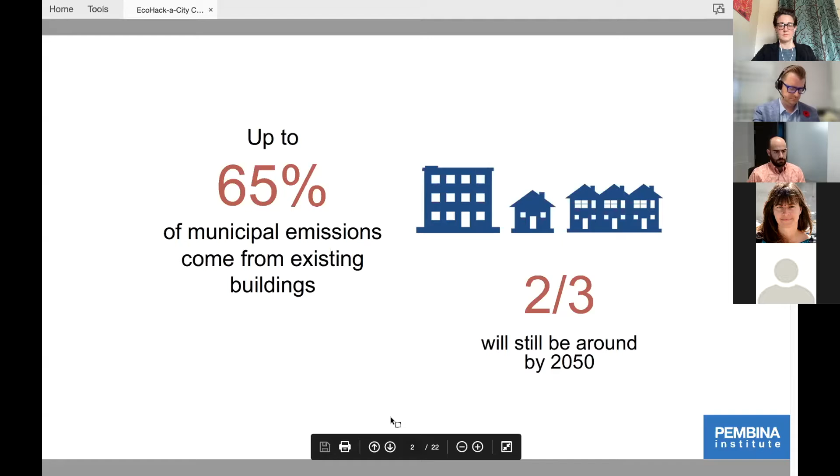We need to retrofit to adapt to this new climate reality. In recent years, Calgary has suffered more than its fair share of flooding, poor air quality, and extreme temperatures. And the current pandemic has made people acutely aware that buildings must be able to protect us in times of crisis. To borrow from Greta Thunberg, our buildings are on fire. The majority of our buildings are not climate ready, and we are just beginning to understand the potential costs of recovery, rising insurance premiums, and in some cases, lives lost. Now consider that we spend upwards of 90% of our lives inside, right?

We need to retrofit for our health. Indoor air can have as much as or higher levels of pollution than outdoor air. Poor indoor air quality can lead to sick building syndrome, can aggravate respiratory disease like asthma and allergies. It can intensify transmission of infectious diseases like COVID-19, and it can be particularly risky for the elderly and particularly young and people living with chronic illness.

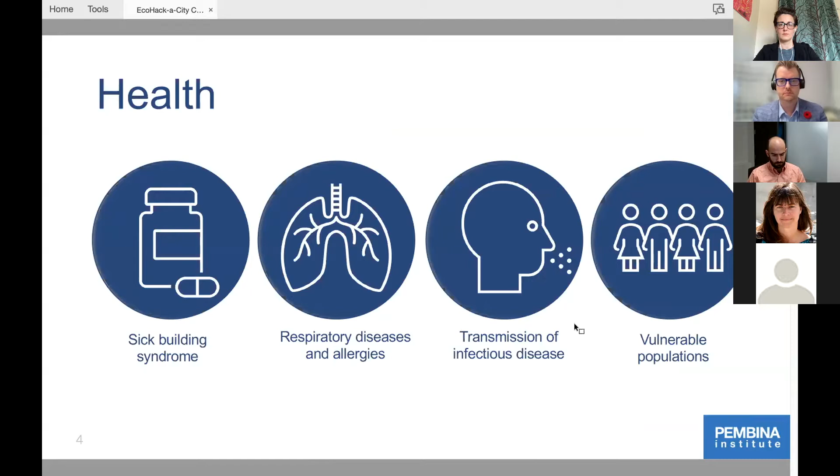Reducing energy demand and carbon pollution aren't the only reasons we should be retrofitting. Slide. We also need to retrofit to improve equity. 16% of Calgarians are living with high energy cost burdens, meaning they need to choose between staying warm and eating. Also, over half of Calgary's homes are more than 30 years old and due for major repairs.

In 2017, Statistics Canada reviewed housing conditions across the country and found up to a quarter of Canadian homes have moisture problems. Nearly 10% have poor indoor air quality, and 17% of homes need major repairs. And that number is even higher for homes on reserve lands at 43%. That's more than double the national average.

Industry knows how to do these, but there are some things standing in the way. On one hand, industry capacity is limited. Innovative solutions developed around the world are not readily available in Canada. And without clear regulations, there is no motivation for this to change. From the demand perspective, deep retrofits, they're just complex and they require significant upfront investment. People trust the technologies they've known all their lives.

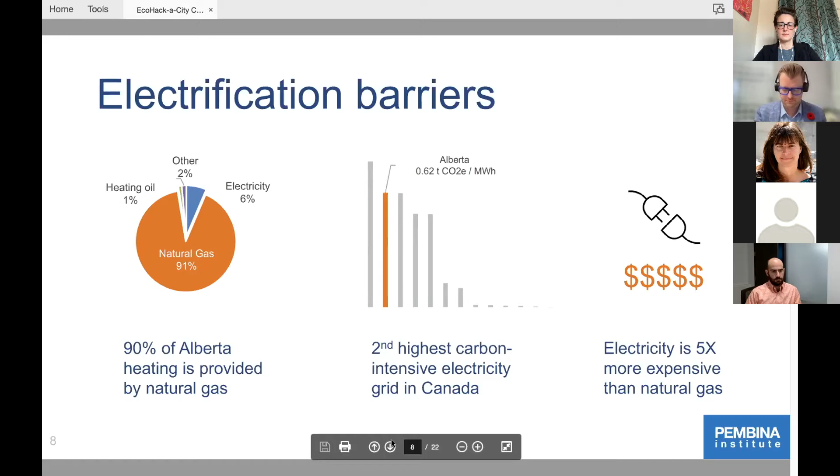Here's where I get optimistic. Well, I'm not quite yet. On the downside of all of that, there are real costs to inaction, or worse, locking in fossil fuel-based heating systems. At the simplest level, properties that are not ready for increasing intensity and frequency of extreme weather events will not be valued as high as others. Recovering from extreme weather events can be expensive, and residents of Lytton, BC know that better than anyone right now.

FCM, the Federation of Canadian Municipalities, estimates that every dollar invested in climate change adaptation for our infrastructure is estimated to save $3 to $6 in recovery costs. Climate change has been cited as the reason that home insurance rates increased by 5 to 10% on top of inflation in 2019. And insurers are warning that climate change may make insurance coverage unaffordable for people. They're also calling for risk disclosure requirements.

You add to this that utility costs are rising faster than the consumer price index of 1.7%, in some cases as high as 6% a year. Then there's the federal carbon tax, which is scheduled to grow to $170 by 2030. I got ahead of myself, but this is where I'm really feeling optimistic.

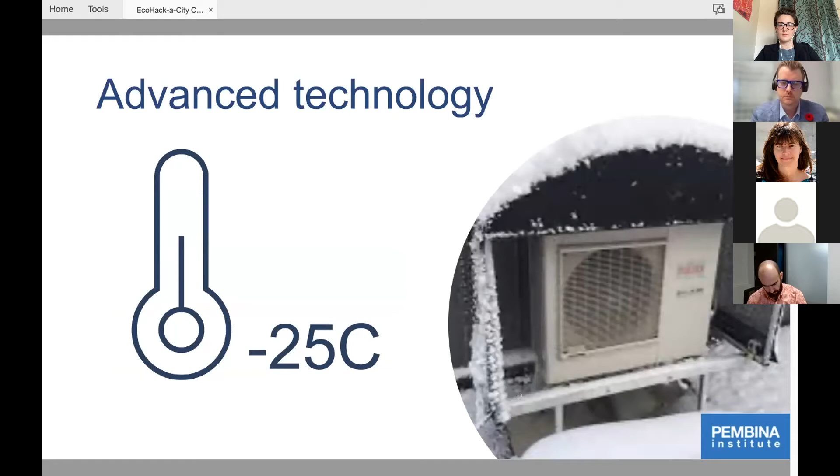Alberta's grid is also getting cleaner by transitioning off coal and increasing renewable energy. I recently learned that Calgary is the sunniest major city in Canada with 333 clear days. That's nearly 3 times more than Austin, Texas, which has 150 per year. It's no wonder that Vulcan, Alberta was just in the news for having the largest solar project in Canada.

My colleagues Binnu Jeyakumar and Jan Gorski just published an opinion piece hailing Canada's opportunity to electrify and calling for interconnection between provincial electrical grids. We need to rethink our systems.

Imagine the solar of the prairies backed up with the hydro from BC, Manitoba, and Quebec, acting as national grid batteries, storing up all of that solar during the summer season and replenishing with their own hydro flowing throughout the winter. Replacing furnaces with air source heat pumps now can help stop the cycle of natural gas lock-in and help Canada break its fossil fuel habit. Right?

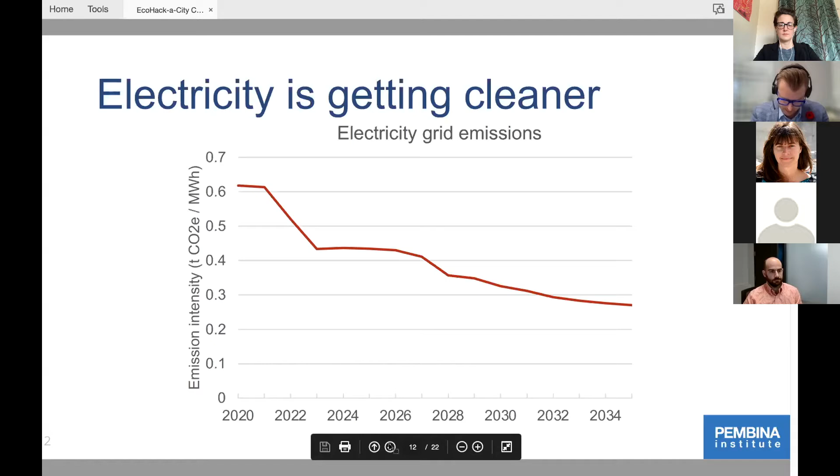COVID-19 has shown how rapidly we can transform what we do. Just like Energiesprong is showing the world how to transform the building retrofit industry. Energiesprong literally means energy leap in Dutch, and it is revolutionizing the retrofit process by applying modern production methods to an industry that is as old as civilization. Their solutions include prefabricated exterior wall and roof panels, high efficiency and low carbon mechanical systems, system controls and performance monitoring, as well as on-site renewable electricity.

Their early iterations could be installed within about 2 weeks. That's down to 1 day on site now. Off-site construction is considerably less disruptive to residents. And initially, the incremental deep retrofit measures cost about 130,000 euros per unit. They've cut that cost in half. 6 years and several pilots later, they've also added solar and are reaching net zero.

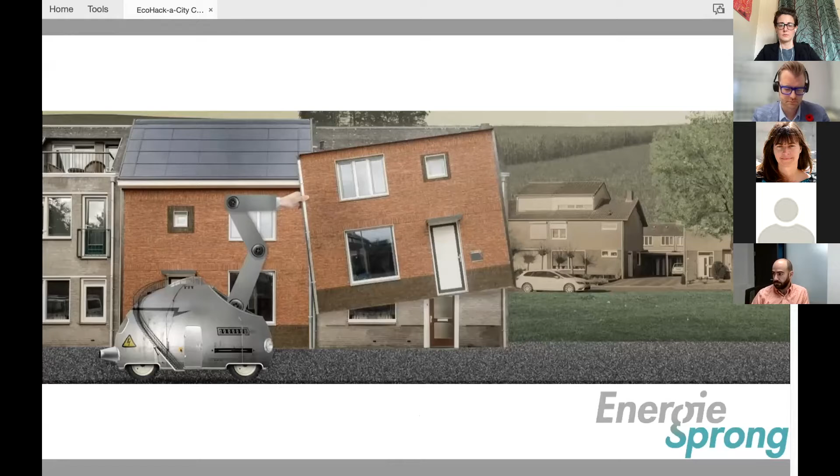And one of the most recent developments is what they call the Magic Box, which houses all of the HVAC equipment along with the solar inverter monitoring and controls, all in a single exterior that is integrated within the exterior wall retrofit. And they're still aiming for better. Right. Energiesprong is now being syndicated throughout Europe, and versions of it are appearing, including here in Canada.

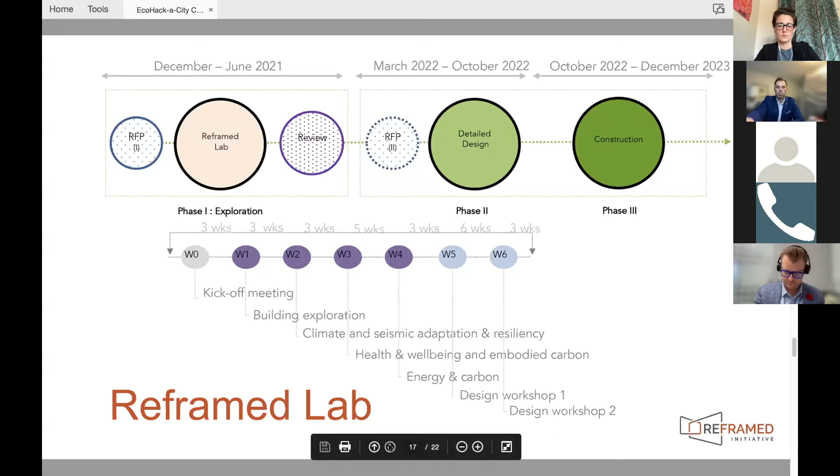Keep going. Design teams will be developing deep retrofits that not only make the buildings more energy efficient and low carbon, but also resilient to shocks such as earthquakes, storms, and heat waves. Smart grid integrated to help utilities better manage loads, and healthy.

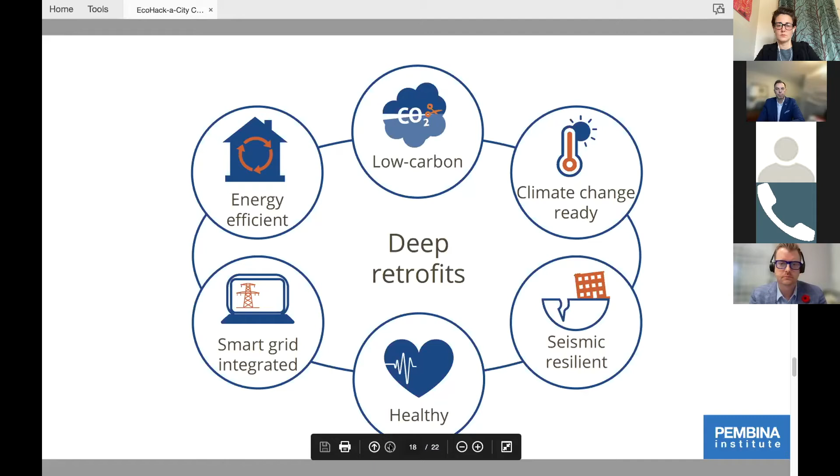In the meantime, I want to leave you with some thoughts on Calgary's opportunities to transform existing buildings. I'm not going to have time to go through all of this in detail, but coming out of the climate resilience strategy action plans and starting with the mitigation plan, there's some good pieces in there, and there's further steps that I think Calgary could take. Keep pursuing an energy step code, but also set a timeline and add targets, including carbon targets. That's a missing piece from the BC Energy Step Code that many people are pushing for.

We need to show some leadership on retrofit code. Unfortunately, the national model code has been deferred to 2030. That's a full 8 years past when the Canadian framework recommended that it be implemented. When you're looking at incentives, they need to go beyond weatherization. We need to be looking at deep retrofits, or else we're going to be back here re-retrofitting the same buildings in 20 years. We also need financing mechanisms beyond energy performance.

We need to fully capture the full social benefits of retrofitting these buildings for the reasons that I stated before. And you also need to take your solar opportunity as a step towards economic resilience. There's a great opportunity in actually developing out the whole solar economy in Alberta. There are other tools such as rezoning, introducing carbon regulations, as well as introducing heating permits, so you have better control on what people put.

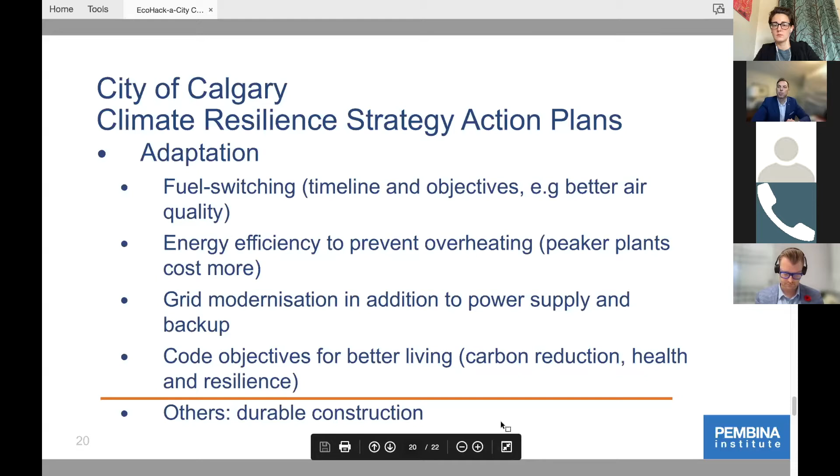Betsy, can you hear me? Sorry, you're breaking up again. Emily and Betsy, why don't we take a look at how many more slides we have to go at this point? A couple, just 2. Betsy, can you perhaps just flip through the rest of your slides so that we can take a look at that, if you can hear me? And we can see how we can share the rest of the conversation. I see we are at our last slide here. And Betsy, we're going to give you a chance to see if you can fix your connection and the power on the other side as we continue into this conversation. I hope that is okay with everybody. Yeah. Okay, good stuff.

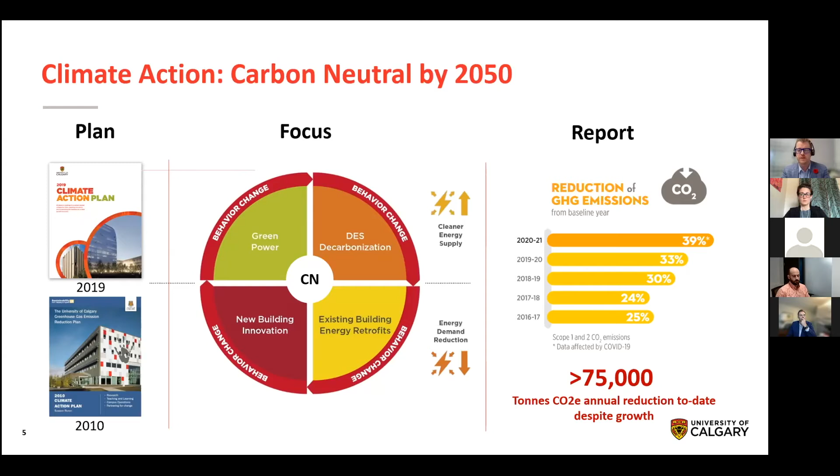So when we're looking at where and how to spend our resources in managing our building carbon footprint through retrofits, we're looking at that top 10. And the MacKimmie project, which I'll talk about in a moment, prior to its redevelopment would have been in that top 10.

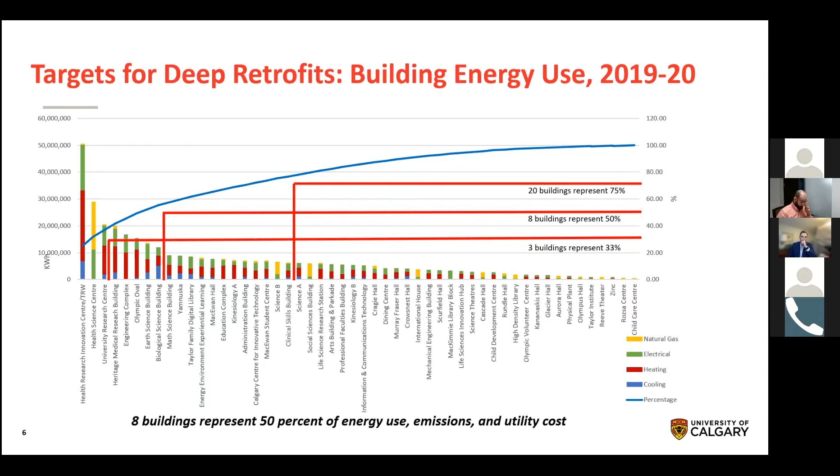So the MacKimmie complex falls right in that sweet spot that the CAGBC identified. It's a 1960s complex that really is one of the longest standing buildings on the campus. The block itself was the second building constructed on what is now the main campus. The adjoining tower was constructed a few years later, and the 2 buildings combined housed the university's library for many years until 2012.

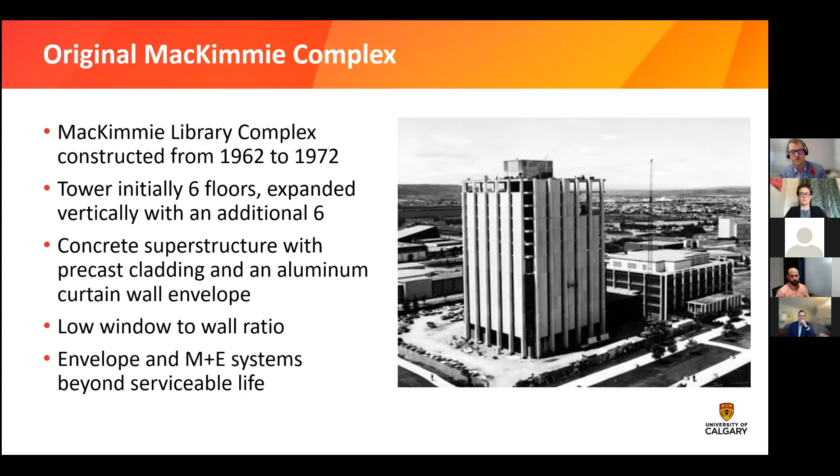At the outset of our redevelopment project, and this was really the trigger, the buildings were suffering from major systems deficiencies. Envelope, mechanical, electrical systems were all beyond their serviceable life. And there was very poor energy performance that really wasn't in line with the university's aspirations or our climate action targets. With support from the Alberta government, the university began the project of redeveloping the complex in 2016.

The scope of the project was set to include a major renovation and expansion of the tower and a complete replacement of the office block. And from the outset, the project included a significant focus on sustainability and a commitment to zero carbon design.

And the decision to undertake the retrofit versus a full demolition and rebuild was influenced by a number of factors. First and foremost, it saved a year of construction time and the costs and disruption associated with that time. And of course, not insignificantly, there were substantial benefits from an embodied carbon and life cycle analysis perspective by reusing the original concrete structure versus a new foundation and structural system.

The program for the redeveloped complex includes administrative office space, student study space, lecture theaters, classrooms, and the Hunter Hub for entrepreneurial thinking. In total, the renewed tower and new link and block buildings include more than 33,000 square meters of new and redeveloped space. That's about 350,000 square feet. The building supports 500 full-time students and more than 1,300 staff. So this is a very significant complex in the center of UCalgary's main campus.

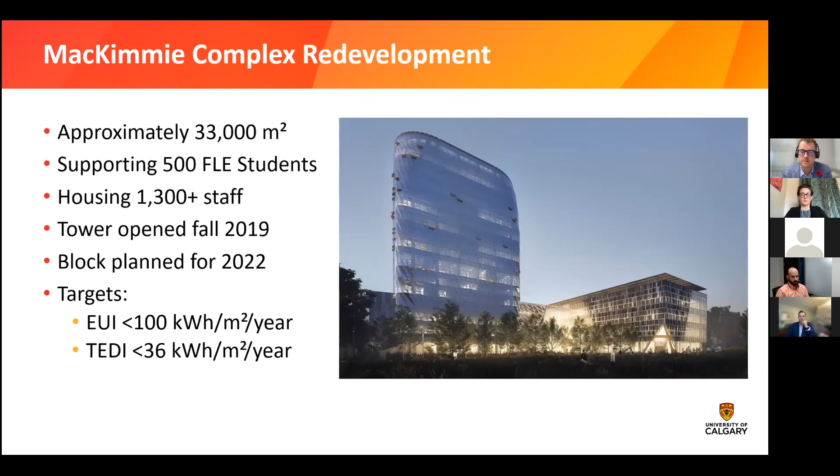So there were significant investments in the building above and beyond a business as usual approach to meet and exceed zero carbon levels of performance. And that investment was largely in the envelope and in the renewable energy generation in the form of solar PV. Because of this approach, significant capital savings were realized on mechanical systems, and that savings was redirected into an investment into the structure and the double facade.

Considering the dramatically reduced utility costs for the building, we're anticipating about an 85 to 90% reduction in those costs. It's estimated that our return on investment, or our net present value, in making this building a zero carbon building is very positive. Relative to a baseline, we're looking at about a $10 million net present value in the most likely scenario.

Important to note that the university's baseline building is probably higher than your typical commercial developer, where we would be comparing to a LEED Gold building with an energy performance of about 25% better than code. So our baseline is significant, but above and beyond that baseline, the project still provided us with a very significant return. And that return doesn't quantify in any meaningful way all of the additional benefits. And again, Betsy alluded to this around wellness, resilience, adaptation, productivity, and student and staff recruitment and retention.

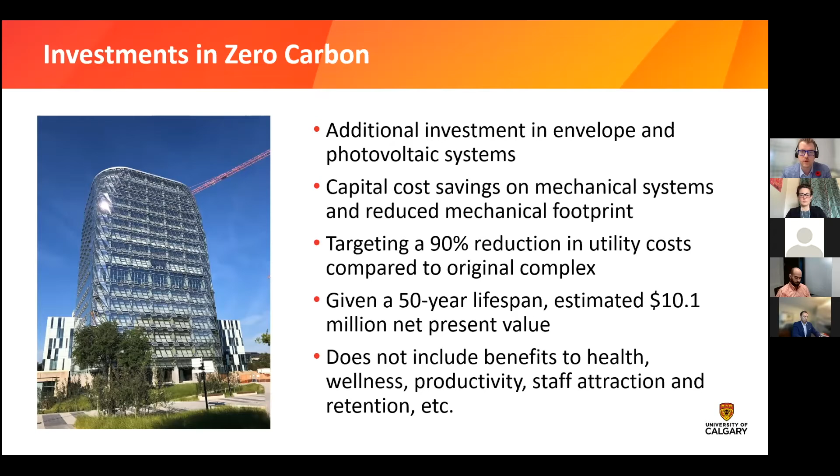It required rethinking the design process. And as a function of rethinking the design process, it required rethinking our approach to procurement and our approach to partnering and teaming with the consulting, engineering, and design community. The team members are on the slide in front of you.

I just want to mention that DIALOG was engaged in a number of roles, but Architect of Record in particular, in large part, I think that was a function of their leadership and experience in the Government of Canada's first zero carbon building in Toronto. That's the Arthur Meighen building. So that hands-on, on-the-ground experience with a similar project was incredibly important to us.

And then the other one I want to highlight is Transsolar Engineering out of Germany. They're a global leader in performance engineering for zero carbon buildings, and the university very much wanted a team with lived experience around design and construction of buildings of this caliber and of this performance.

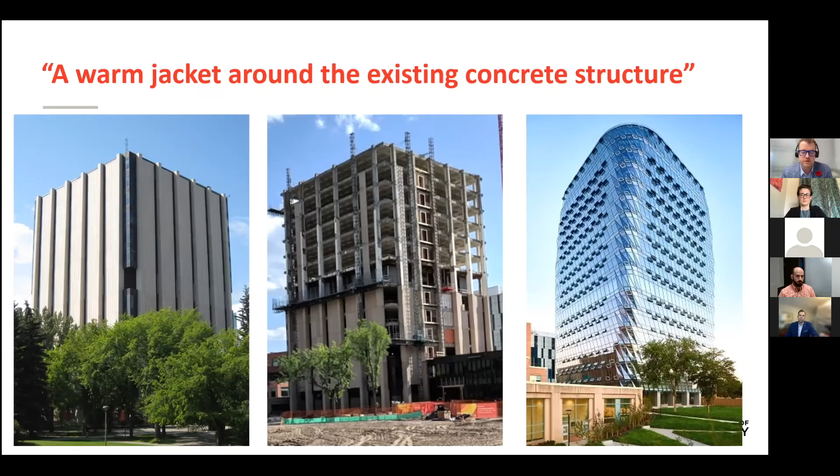It's also worth noting that the design leverages the concrete mass of the structure. For example, in the summer, night flushing cools the building and the concrete, and then over the duration of the day, the concrete slowly absorbs the heat and helps maintain thermal comfort.

I should also note that the pursuit of the zero carbon standard and an ultra low energy and emissions project was not at the expense of other aspects of sustainability. There was a significant amount of energy put into innovative approaches to address water efficiency. There is a rainwater capture and storage facility in the basement of the building, and that's used for toilet flushing through a purple pipe system.

Life cycle impacts were very carefully considered, as I alluded to, and then there was significant work around the facility in Swann Mall in terms of site development and its alignment with our Indigenous strategy, and Indigenous approaches to management of the land. And then finally, very significant focus on human health and well-being, and daylighting and occupant comfort.

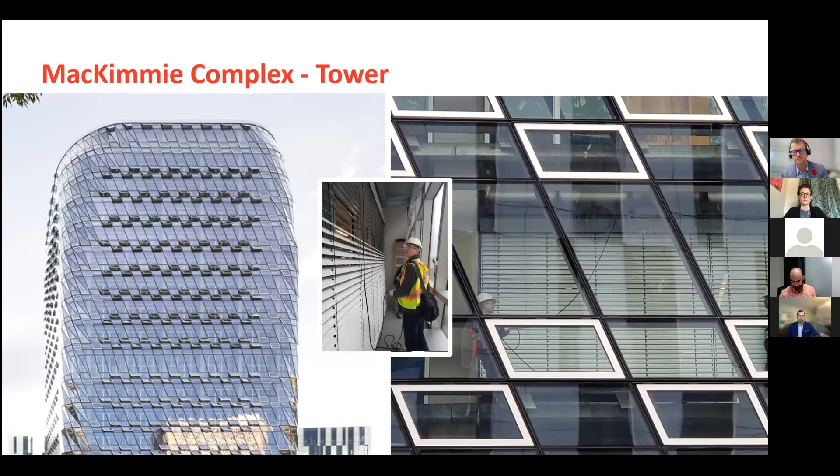There is a significant photovoltaic component, more than 500 megawatt hours of renewable energy annually in 3 areas. One is on the roof of the tower. That equipment is still being installed. It's not yet operational. There were delays associated with COVID and a number of other factors, so that is underway now. And then the second and third components are both on the block.

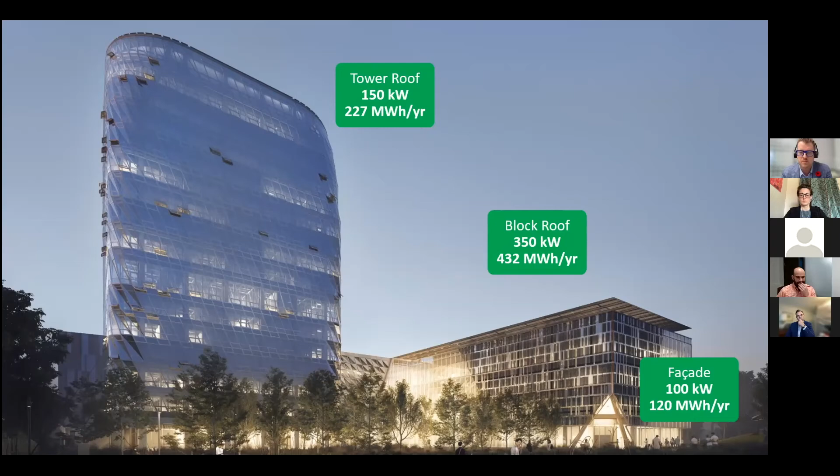So I'm not able to share with you the actual performance data. The building has been open for 2 years. Yes, unfortunately, it opened just a couple months before COVID. And it was a phased occupancy. So it opened in the fall of 2019, but we really haven't had even a partial full occupancy through the life of the building to date. The solar PV, as I mentioned, has not been operational.

So not that we don't want to share the data, it's that the data we have is not terribly meaningful and really not indicative of how the building will ultimately perform once we start to see what we expect to be a full occupancy load beginning at some point early in 2022. But when we have that data, we will be very happy to come back in a similar forum and share that with the wider community.

But what I can share is relative to our baseline for institutional buildings in Canada and your typical LEED Silver building, the predicted performance of the MacKimmie complex overall, when it is fully operational in terms of the solar PV array, and it has a full occupant load and complement of staff and students, will be in excess of 85%. We're aiming for close to a 90% reduction in both energy and emissions associated with operating that facility.

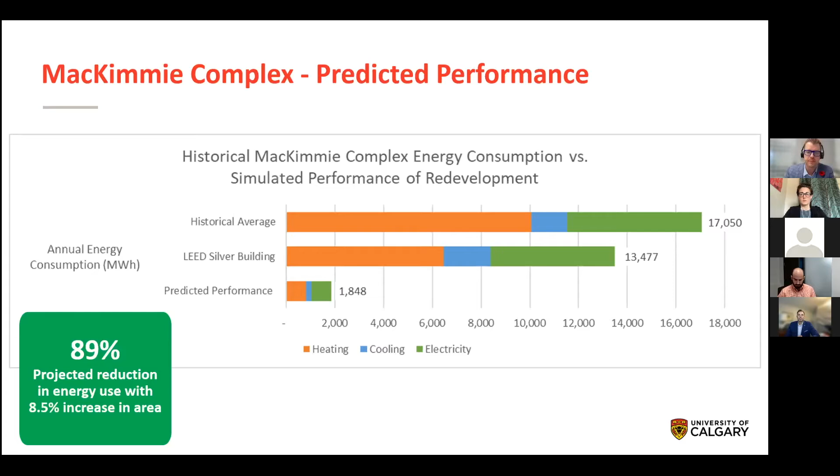2 more slides. Sorry, Dick.

So the building has achieved zero carbon building certification through the Canada Green Building Council for the design. We are pursuing operational certification once we have 12 months of good data. So again, once that's available to us, we'll circle back and share that with you. The building is also targeting LEED Platinum through the Canada Green Building Council.

And finally, I just want to leave you with some conclusions around what made this project successful. Fundamentally, the university started with a very clear vision around not just what this project needed to look like, but how the campus is approaching climate action, and specifically how it needs to approach existing building retrofit work. So when the opportunity arose to retrofit this project, it wasn't a battle to sell a zero carbon approach to the building. It was part of our planning, part of our visioning, and part of our aspirations as a campus for this building.

It's important to focus on the total cost of ownership versus component cost. I indicated there's a positive NPV, but that really only works when we're looking at the entirety of a facility and the entirety of the systems within it, and we're looking at a lifespan in excess of 50 years.

I talked about getting the right team and embracing the integrated design process. I don't think I can emphasize enough how important it is to get a team that is experienced with this kind of design work and this kind of building performance. It is a different process, it's a different design, and it is a different skill set, particularly when it comes to building performance modeling and driving the design from a place of energy data and emissions management.